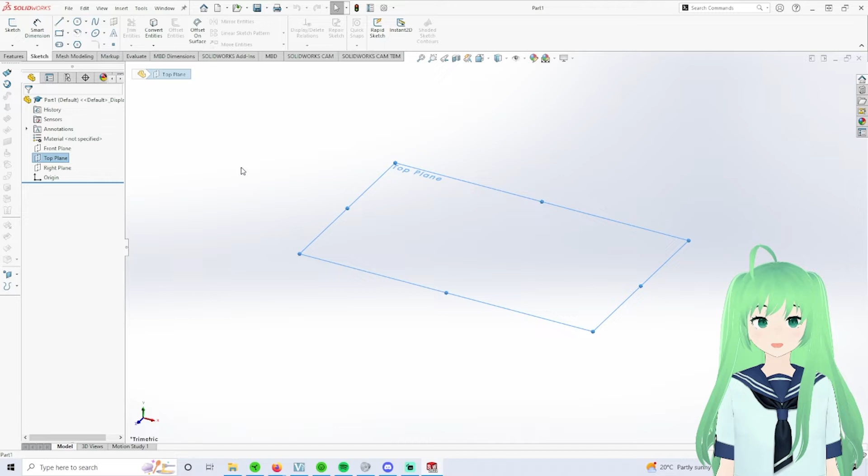And go Sketch. You're going to go Tools in the top, and then Sketch Tools, and then Sketch Picture. You're going to grab the picture that you just cropped. Make sure you have the crop version, the big version will make SOLIDWORKS really, really slow. So grab the cropped version and let it load.

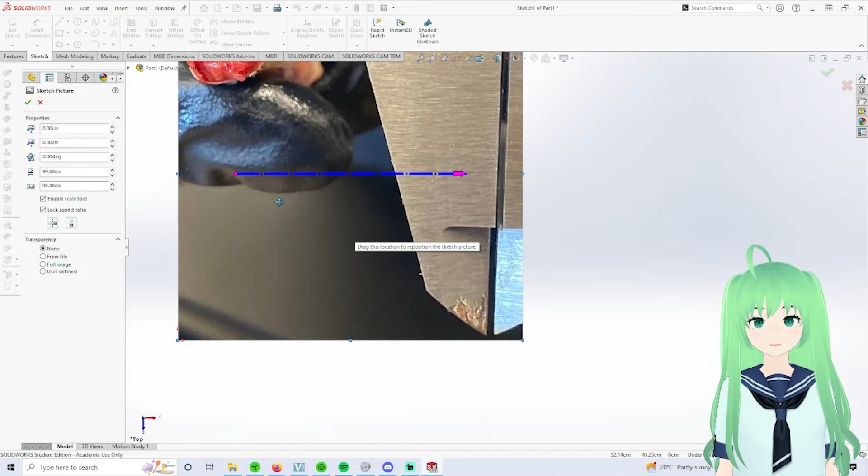Great. So this blue line is the scale line, and this is where the calipers come into play. So in order to scale it properly, you're going to grab the end of the line and drag it to...

So while I'm holding down my left click, which is letting me move this, I can still scroll in and out. So I'm going to scroll in and put it right approximately at the tip.

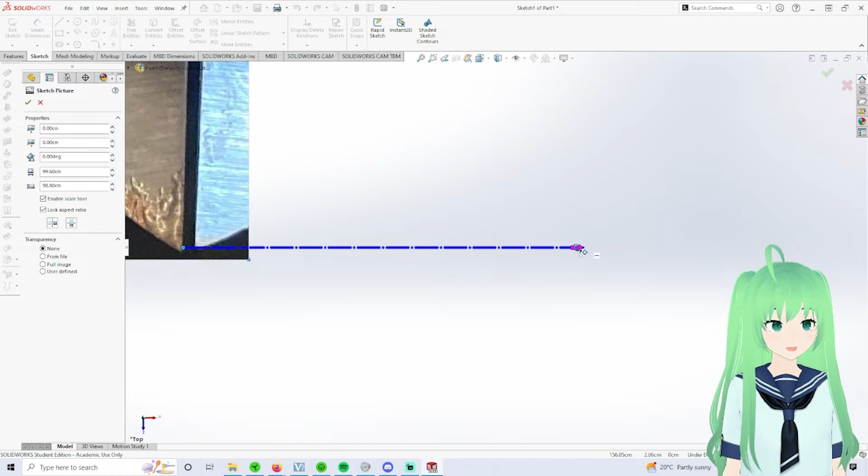And then I'm going to scroll out to grab the other end. I'm going to grab it, do the same thing where I'm going to zoom in to exactly where I want it to be, and drop it there.

I want it to be perpendicular with the calipers. The calipers being a little crooked in this picture. And then I'm going to set the distance as to whatever was on the readout of the caliper before you crop the image. So go back to your previous one. In my case, it was 0.79 centimeters.

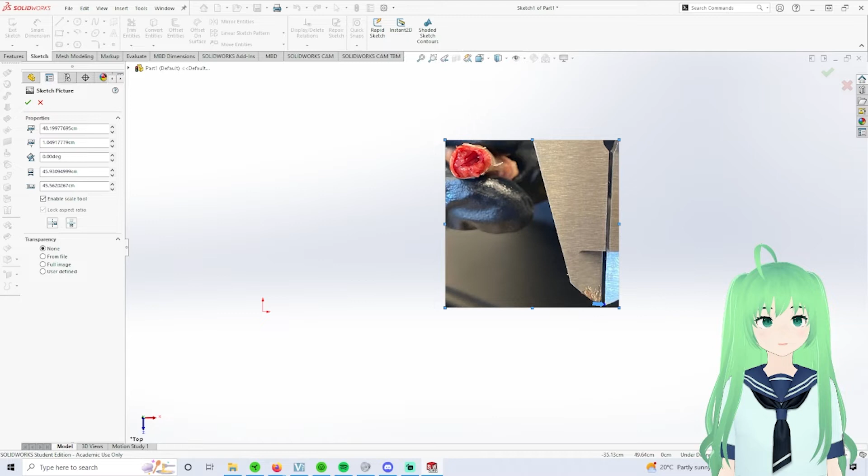Great. Then the whole image is going to resize, but double check that it's still lined up. It is. Great. And then you can just press the check mark, and now you have your sketch picture.

Now exit sketch, and you're going to make a new sketch also in the top plane. Grab your top plane again, or whatever plane you made your first one on. So if you made your first sketch on the front plane, make the second one on the same plane. And we're going to sketch. Now we care about the bone.

So let's grab the spline tool. And I'm just going to go around and drop points on the edge of my bone.

The more points you drop, the more accurate your moment of inertia will be. And then to finish, to close the spline, just drop the point on top of the last one.

Then we're going to do the same thing for the inside. If there are bits of the inside that you can't see because of the goop and blood, just try to guess where it would be based on where it has been for the rest of it.

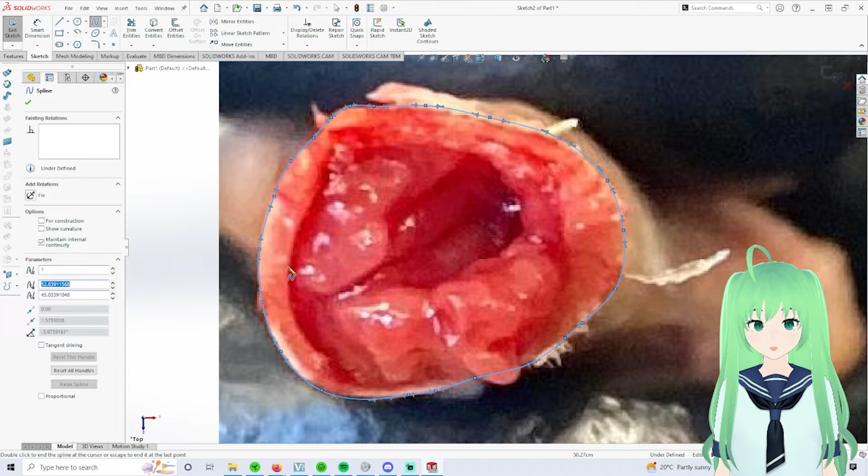Just one other thing you want to be careful of is SOLIDWORKS is going to want to put in these automatic snaps, like you see how it's trying to snap into place. SOLIDWORKS is going to try to force that on you, and just don't let it make you put this point not where you want it.

Just kind of try to wiggle your way out of them where you can, because they will throw your spline off. Right, because like right here, for example, it wants me to put the point there when I want to put the point here.

Like I don't want it to snap into place to be vertical with the other dot I put down. So just be conscious of the fact that SOLIDWORKS will try to fight you on this, because SOLIDWORKS isn't really built for modeling organic materials at all, but you know, it is what it is.

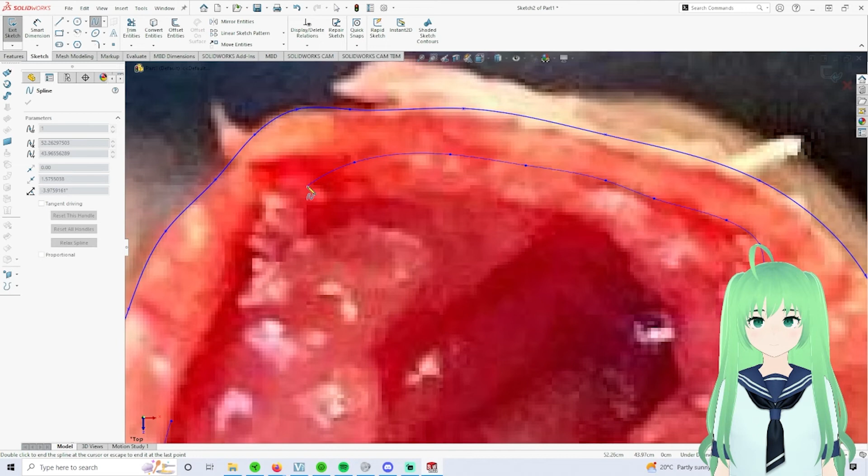Okay, great. Now we have our two splines. Exit the sketch. Hide the picture, just for your own mental sanity. So right click on it in the left and just hide it. So now we're left with our two splines.

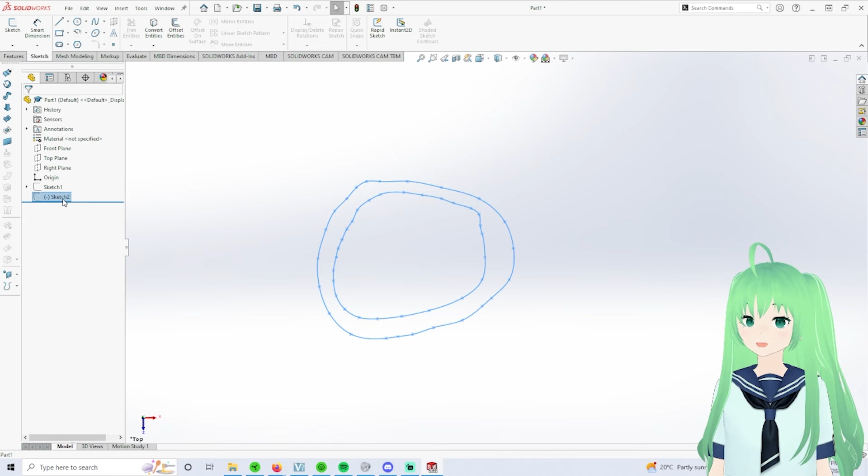Grab your spline. So click on sketch 2, which is your spline sketch in the feature tree. Hit extruded boss base, and it's going to let you extrude it. For visual purposes, I wanted to do it slightly more than 1, so I usually have it be like 5, but it doesn't matter. So here's the model of your bone.

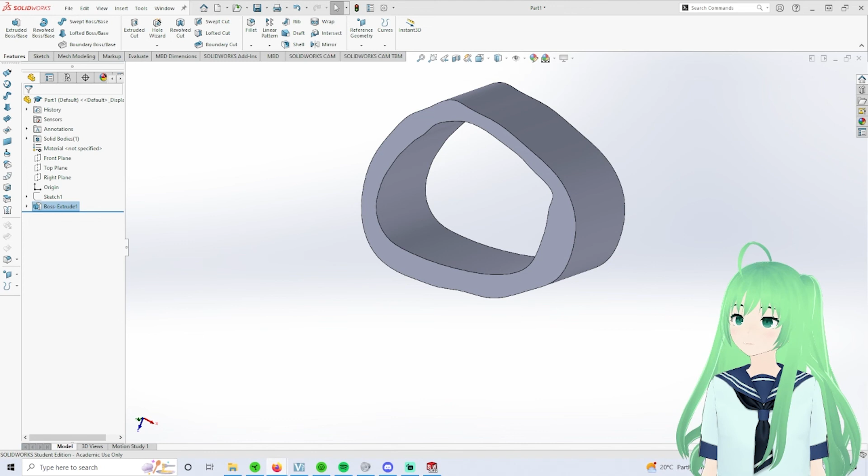Sick. And now, sorry, I'm just, now grab the face and then go evaluate and then go section properties. And here we have moments of inertia at the centroid.

And that is all you need to do. Don't forget to save your file and take some pictures of the process, then repeat them for the other cross sections.